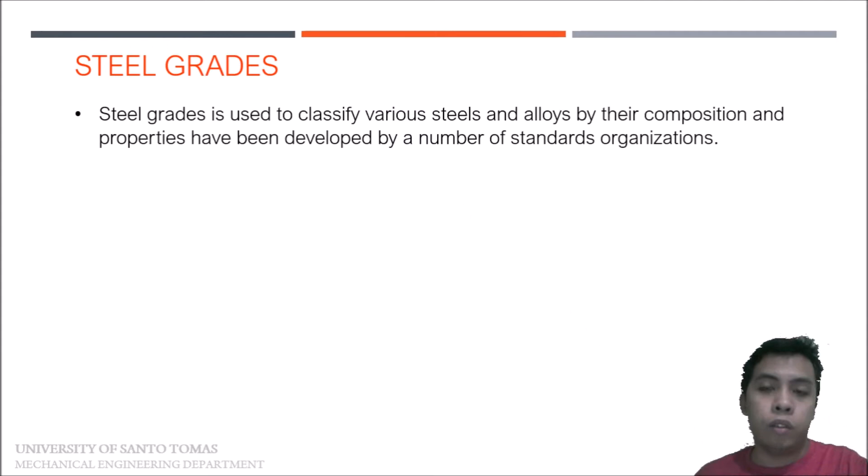What are these common standard organizations? We have AISI, the American Iron and Steel Institute, and SAE. AISI, the American Iron and Steel Institute, gives material grades specifically on iron and steel. We also have SAE, the Society of Automotive Engineers, and ASTM International, the American Society of Testing and Materials. Lastly, we have the Aluminum Association, or AA.

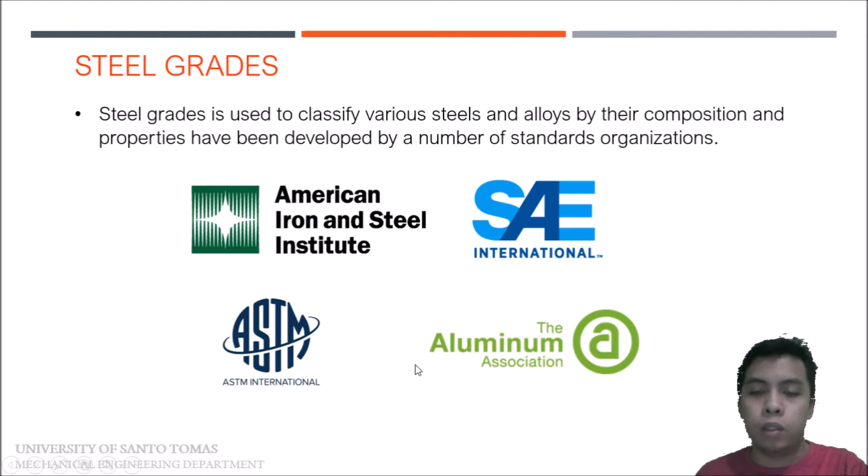There are many other standard organizations, one per country typically. In Europe, there are different standards for steel grades or metal grades. In Japan, there are also different standards, and so on.

Let's talk about AISI SAE steel grades. In this video, we will focus on the AISI SAE designation system. The SAE steel grade system is a standard alloy numbering system for steel grades maintained by SAE International.

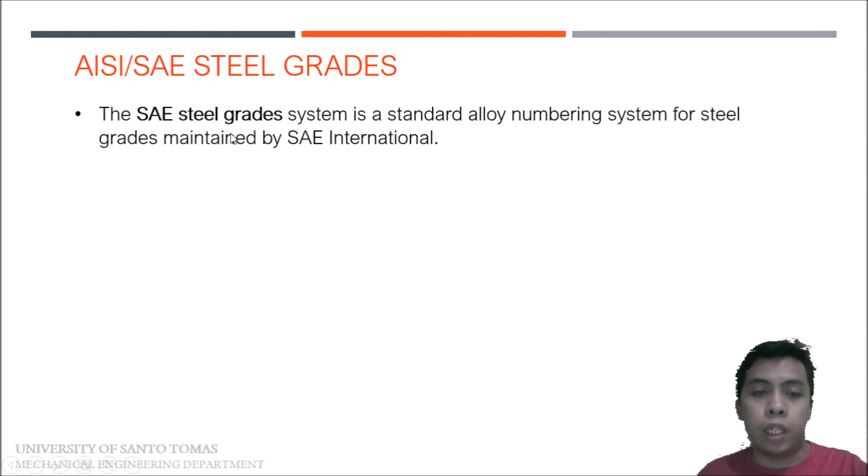In the 1930s to 1940s, the American Iron and Steel Institute and the Society of Automotive Engineers, or SAE, were both involved in efforts to standardize such a numbering system for steels, to make it easier to fabricate or produce certain materials with certain mechanical properties. For several decades, the systems were united into a joint system designated the AISI or SAE steel grades.

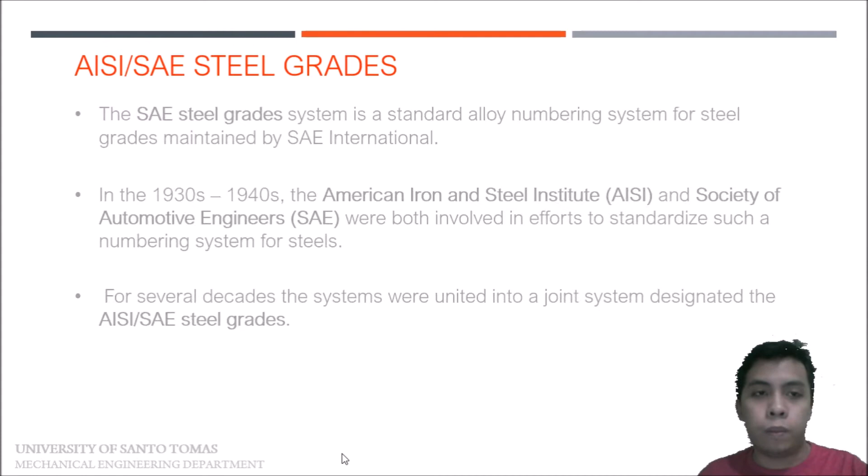In 1995, the AISI turned over future maintenance of the system to SAE, because the AISI never wrote any of the specifications. The majority of specifications for steel grades using this system is published by the SAE. So the maintenance of the system was turned over to SAE.

The SAE steel grade system corresponds to other alloy numbering systems, such as the ASTM SAE Unified Numbering System, or UNS. We will discuss this in future videos.

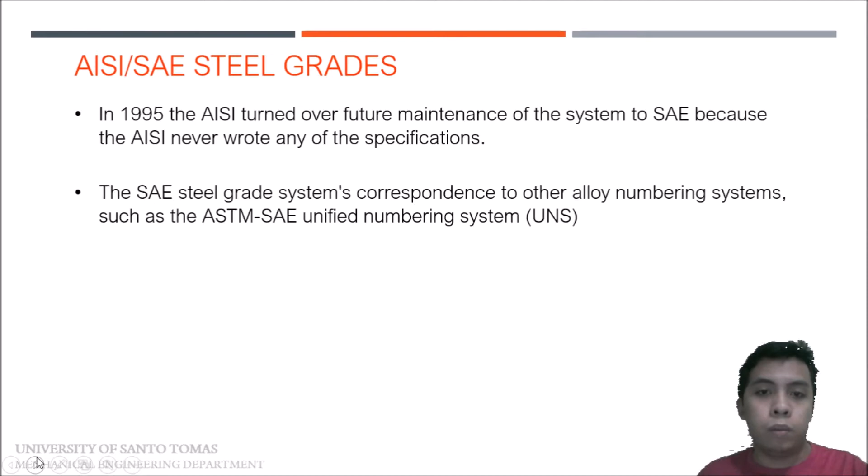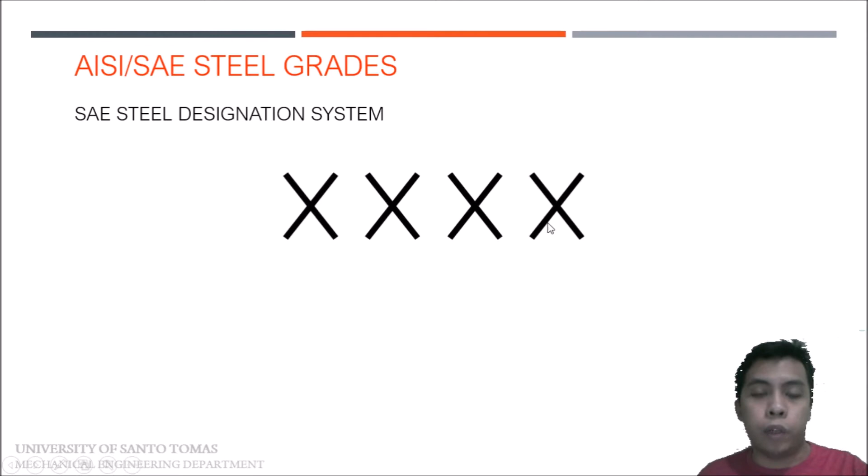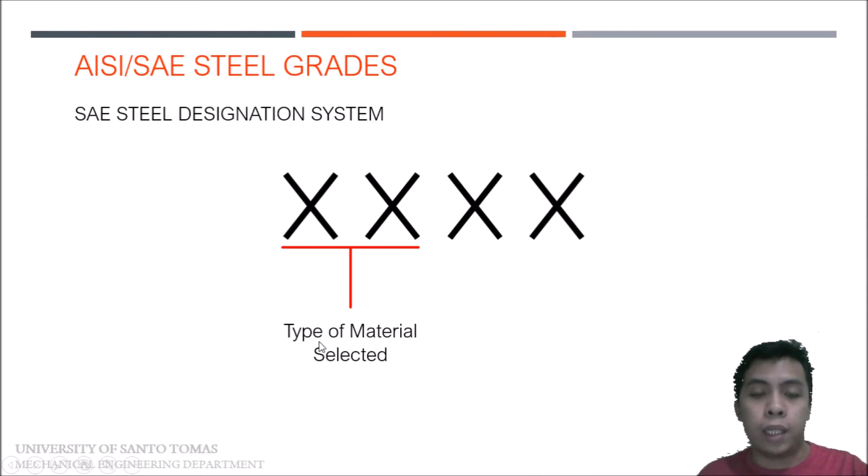The SAE steel designation system comprises 4 numbers or 4 digits. Let's discuss what these 4 digits mean. The first two digits represent the type of material selected, and the last two digits represent the amount of carbon present in the steel.

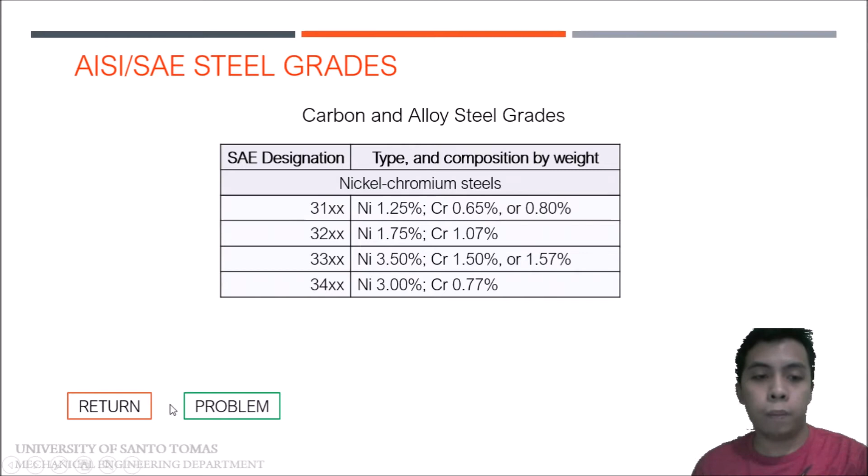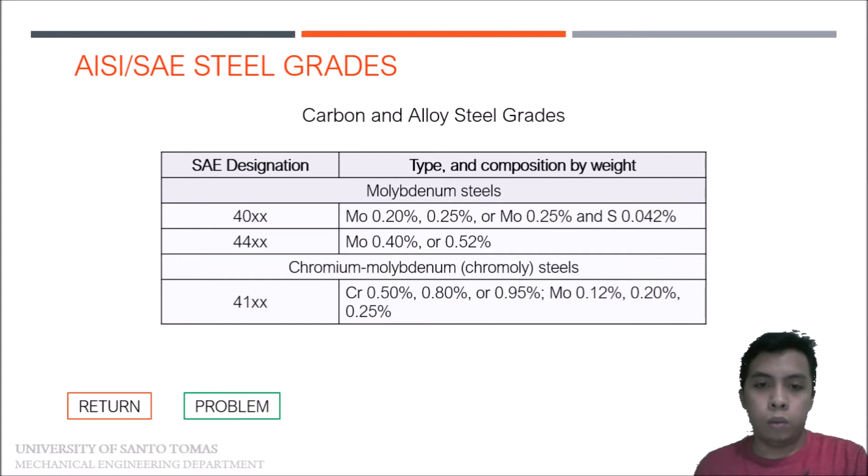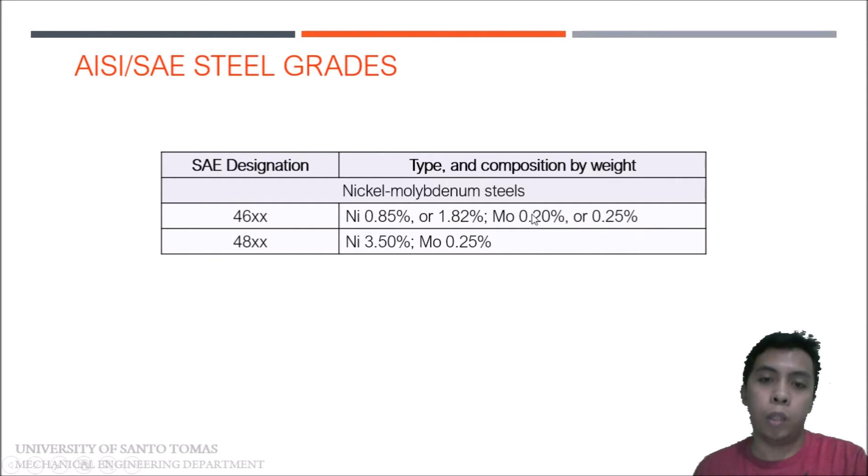The amount of alloying element in stainless steel is large, so they are considered high alloy steels. In this case, the percentage of chromium is small, so it is not considered stainless steel. We call this chromium steel.

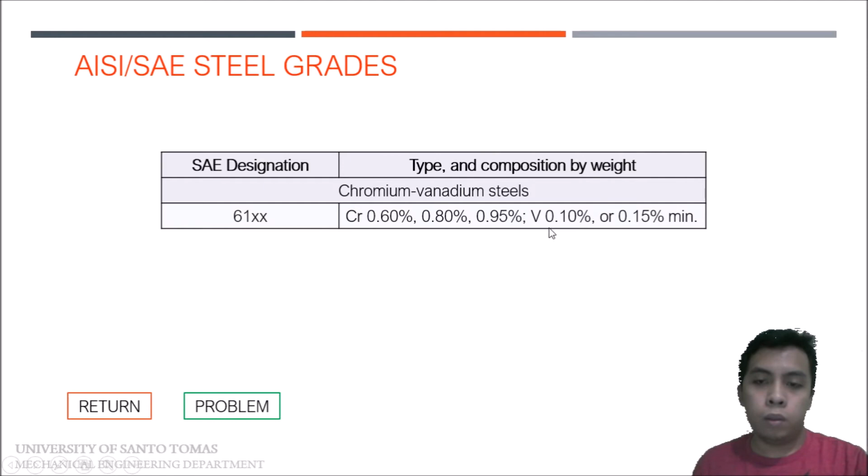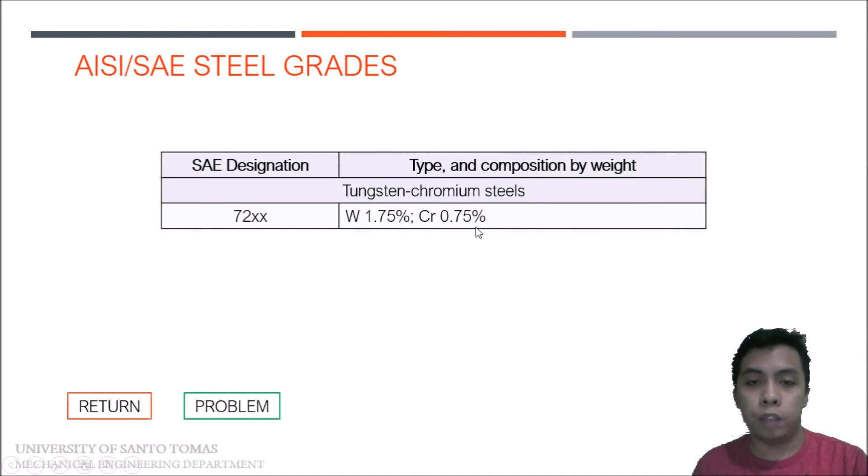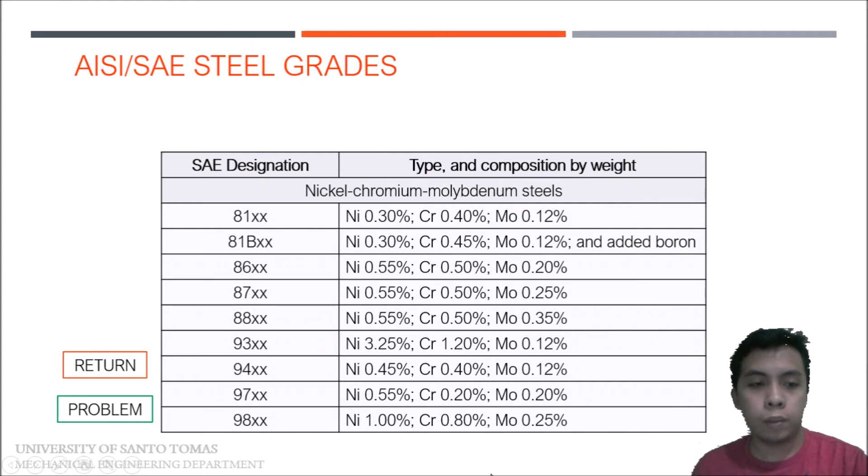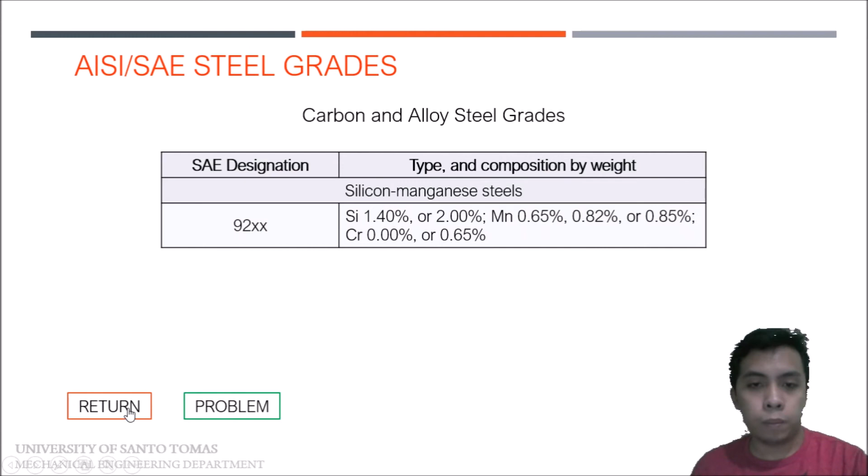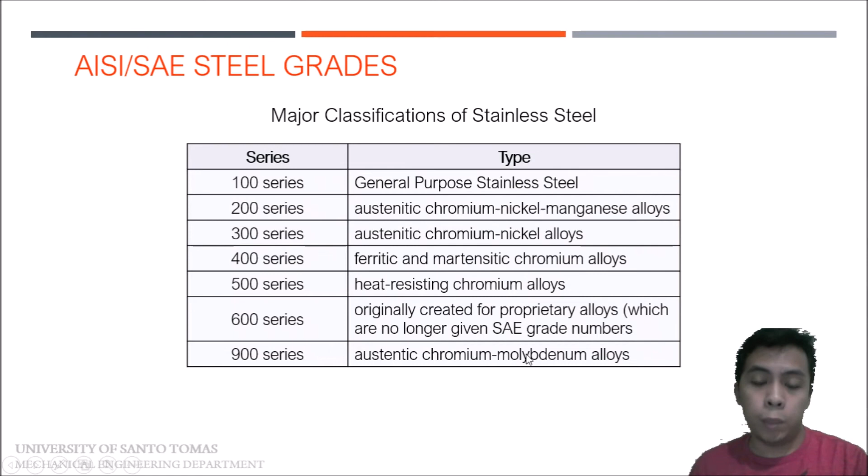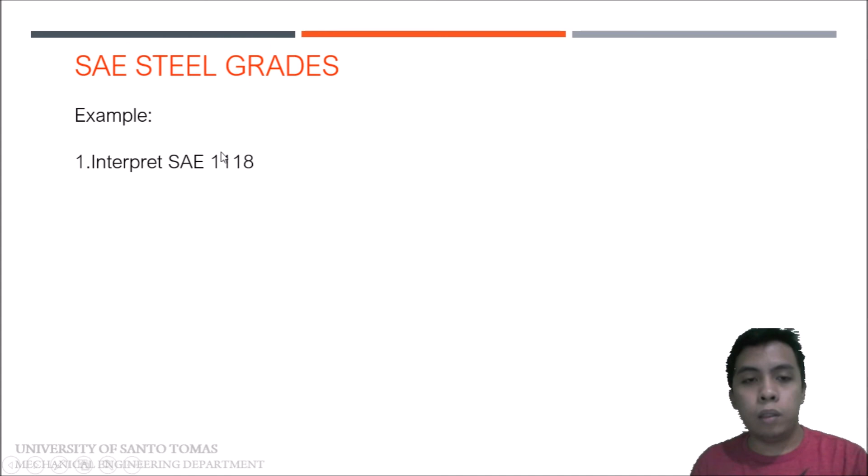So para mas maintindihan natin yung SAE steel grade system natin or the SAE AISI, magbigay tayo ng example and then interpret natin yung binigay na steel grade into the specifics, no? So para magamit din natin yung mga tinuro kanina. So first, interpret natin yung SAE 1118. So una nating gagawin, titingnan natin yung first two digits. Kung makikita natin, the first digit is 1, therefore it is carbon steel. And then 1, most likely it is resulfurized. So babalikan natin yung table kanina, no? So base dito sa table natin, under siya ng carbon and alloy steel. And then the material is resulfurized kapag under siya ng 11 series.

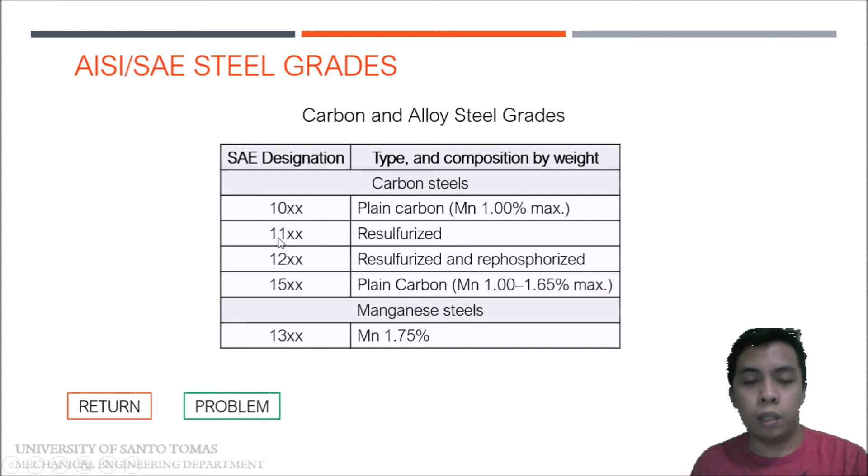Next, titignan natin yung last two digits. Kagaya na nabanggit ko kanina, the AISI SAE designation system consists of 4 digits. The first two digits yung diniscuss natin sa mga table, and the remaining digits will be the percentage of carbon. So yung percentage na yan, hindi yan 18%. So ang gagawin mo lang, i-divide mo sa 100 and that will be the percentage. So our carbon content of this material is 0.18% of carbon. So SAE 1118, that is resulfurized carbon steel containing 0.18% of carbon.

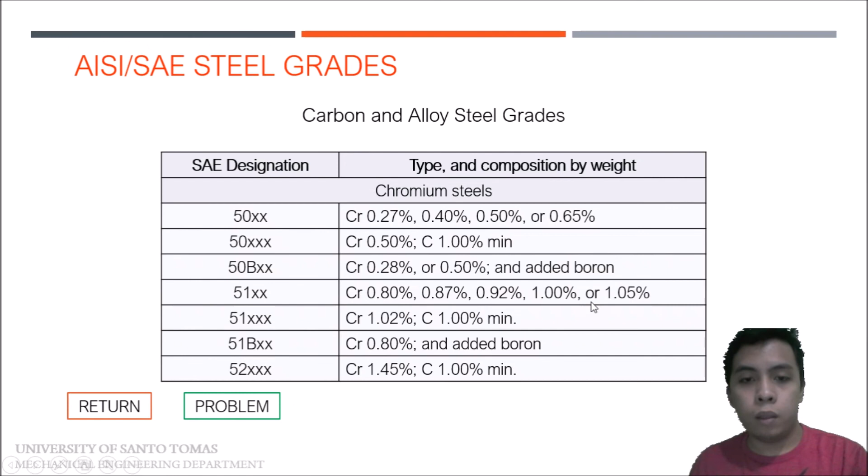Next, let's interpret this steel grade, no? So we have here SAE 5130. So titingnan natin yung first two numbers natin, 51. So that is chromium steel alloy with 0.8% to 1.05% chromium. So kung babalikan natin, we have here 51 series. So dalawa yung 51 series natin. We have 5 digit na 51 series and we have 4 digit. Since ang binigay na sa atin na designation is 4 digit lang, ito yung titignan natin. Next, titingnan natin yung last two digits, which is 30. So meaning, the carbon content of that material is 0.3% ng buong composition.